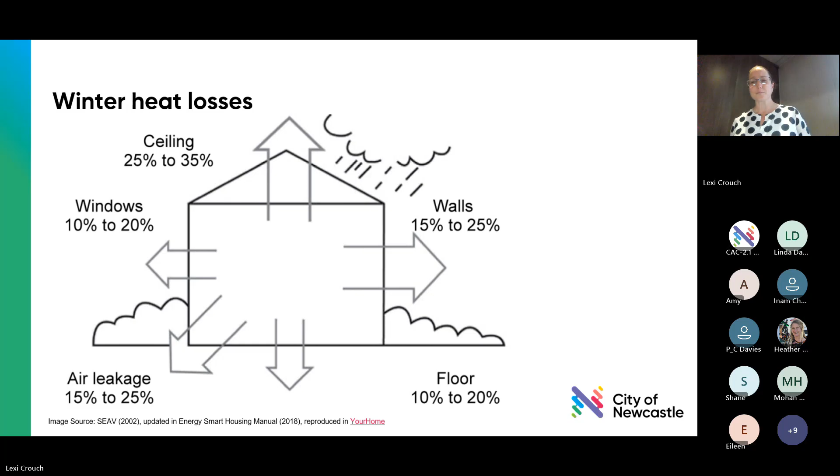We also lose heat through the walls, the floors, there's air leakage and windows. And depending on your home, these factors might differ. So my home being relatively new, air leakage is probably a big thing. If you're pre-1990s, I would imagine that air leakage, but also potentially all of these could be an issue for you. And you will get a copy of the slides later on, so you'll be able to refer to them later on.

So insulation is always what we start with because it is where you can have that greatest return on investment. You can save up to 45% on your heating and cooling costs. So insulation is both good for winter and for summer with a well-insulated ceiling and roof. If you do wall insulation, you can save up to another 20%.

If you're DIY, although with insulation, you definitely do need to read up before you start putting it in, it can cost as little as $10 to $18 a square metre. So for 100 square metres of roof, you're looking at about $1,000 to $2,000. So not big in the big scheme of things. So in terms of priority, every house, the first thing you want to do is address ceiling gaps, and I'll show you some on the next slide.

The second no-brainer for any kind of house is to increase or add ceiling insulation. So when I did my home, R2.5 was considered good. Now you want R5. And the easiest way to do that is I've got 2.5. I can go in, put another layer on top, and 2.5 plus 2.5, you're up to 5. So when I built, 5 wasn't particularly easily available, whereas now you can go to a lot of hardware shops, insulation places, and get R5 ceiling insulation.

If you walk upstairs into the front of your house, chances are you're on piers and joists. So if you walk upstairs and you can get access under your house, you can then look at doing underfloor insulation, and that can be a decent investment. And if you're doing renos, you'd want to do underfloor.

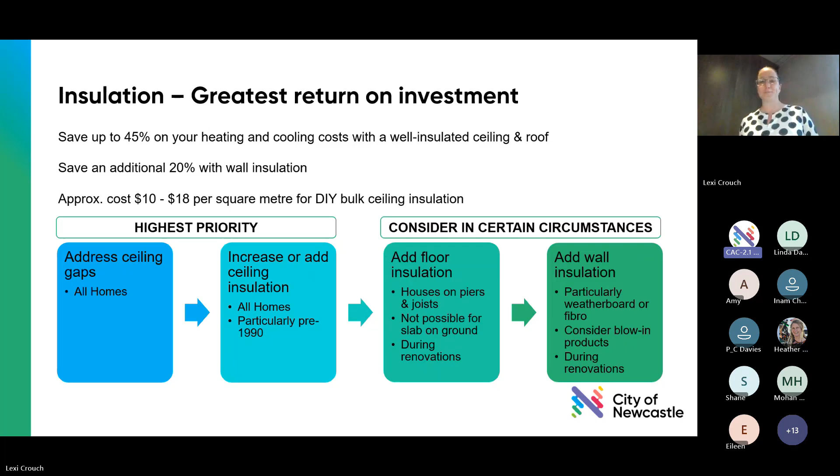So these are a couple of photos that I've accumulated along the years. The first one on the left is my in-laws' house. They had a leaking roof recently, and I went up there and went, oh my God. It seems like every bit of reno that they've done in the last 40, 50 years has meant insulation's been moved. It obviously wasn't put in certain spots. And so just a 5% gap can mean a 50% reduction in performance.

So that image on the left is not what you're after. The image in the middle is from my home.

I thought things were pretty schmick until I took one of our home energy kits, which are available for hire, went round shooting at the roof on a hot day and went, why is there a big gap above my light fitting? It's a dangling light fitting, it doesn't produce heat up in the roof, so there's no reason for it not to have insulation. When I went up there, there was just a gap, and heat is oozing up through that gap.

This is where with insulation, you have to be careful. When I went into my bathroom, there's a gap above my 3-way heat lamp fan combo, but there's a reason for that - that heat lamp is producing heat, and you don't want insulation up against it. Likewise, you don't want insulation up against a halogen light fitting because they produce heat. So there are some spots where you should have a gap, but often the gaps in the left two images, there's no reason for them.

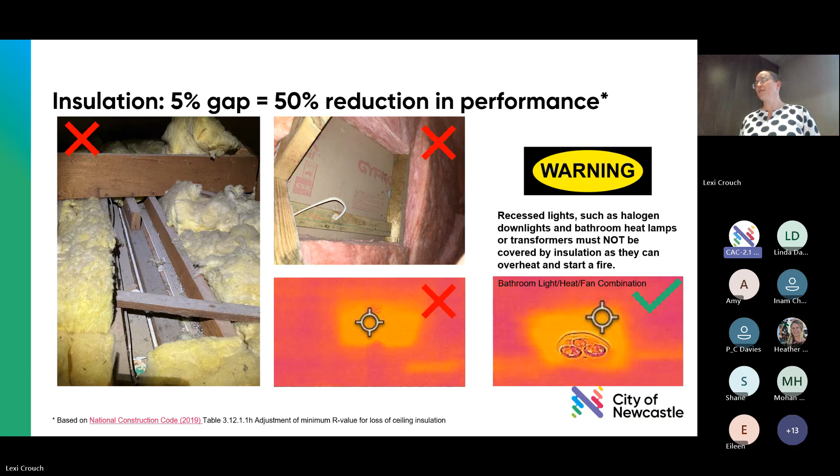If you've got those gaps, plug them up relatively cheaply. Then there's draft proofing, which was my experience as a kid - I swear my entire house leaked from every single spot. Even when I went down there last week, it was still leaking.

This is a photo on the left of one of my colleagues' homes. Not only has she got a gap that lets in the cold air, but it's probably also letting in mice, cockroaches, and dust. So if you're not even going to do it for warmth, do it for all those other reasons. It is relatively easy and cheap, and it is quite addictive.

So once you've got weather stripping, a caulking gun - which is just you press it and the gloop comes out the other end - and expandable foam, those are your typical tools of the trade. You can go around your house wherever you can feel cold, or you can use an incense stick. If you can feel that air moving, chances are you want to block it up.

Slight warning - if you have internal gas appliances without a flue, or a wood fire heater, they will be producing harmful gases that you don't want in your home. So if you plug up all the gaps, you could potentially be poisoning yourself. All the more reason to get off gas and off wood fire heaters. There's probably a reason why I had asthma as a kid, because we had a wood fired heater and a gas stove.

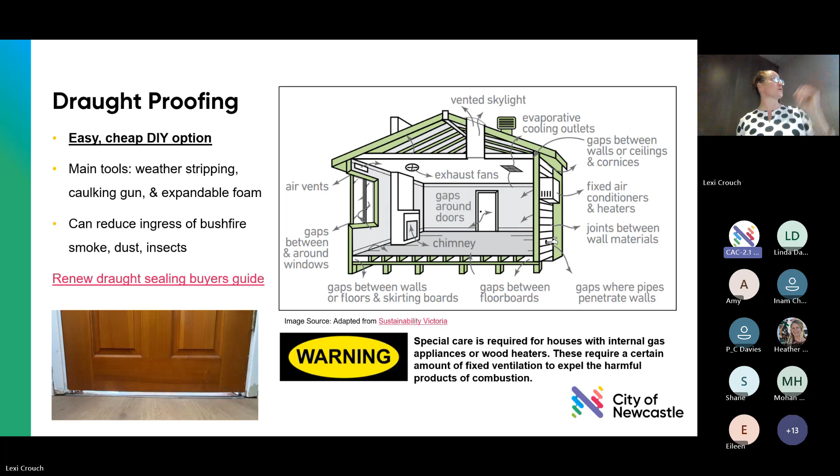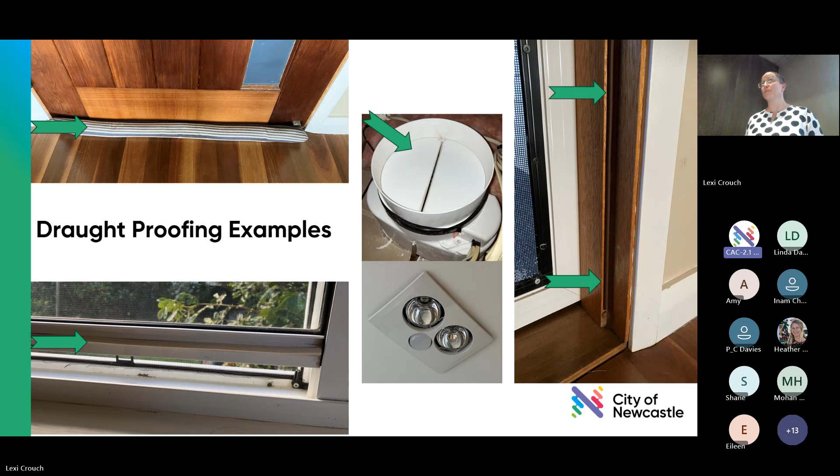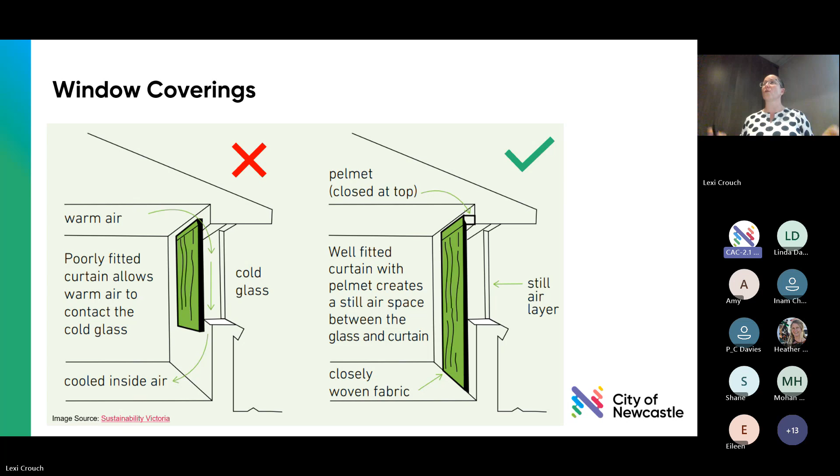So window coverings - on the left is what you don't want. When I built, roller blinds were all the rage, and they are pretty pathetic. Same with vertical blinds, because they let warm air fall down over the cold glass, you lose all your heat, and end up with a cold draft coming out the bottom. What you want is a window covering that doesn't let warm air go down beside the glass and runs all the way to the floor or is fitted neatly around your window.

I couldn't find a good photo of curtains with a pelmet. For people who are renting, a pelmet doesn't have to look ghastly and hideous like they used to when I was a kid - you can do perspex ones.

You can even use cardboard or roll-up towels to block air coming in from the top. You can also do plantation shutters. My mother-in-law decided plantation shutters would uplift her drab 1970s house, but they also work great because when it's cold, she can close the louvers and not have that warm air touching the windows.

Or you can go with honeycomb blinds. The advantage is you can move them up or down, so they're good for privacy too. When you want to be warm or cool in summer, you can have them going all the way to the top and bottom. The main thing is to have something that goes all the way to the edges and all the way to the top, so there's no gaps.

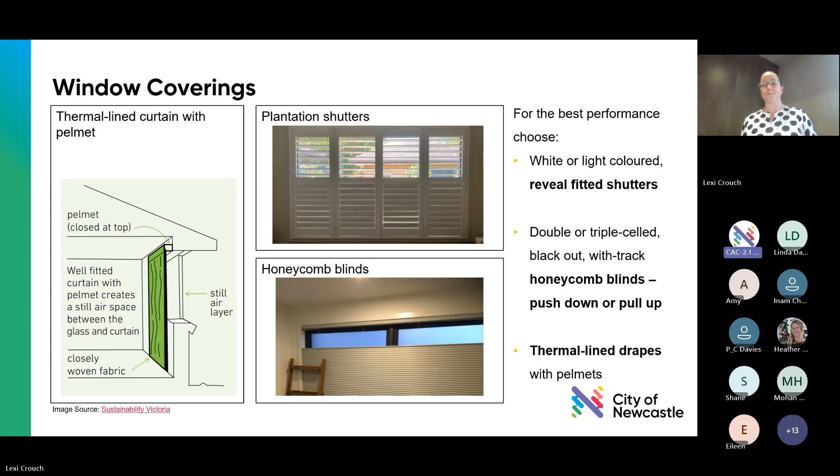Then we move on to floor coverings and room partitioning. I have tiles in one area, which is great in summer because tiles absorb all the heat and never increase in temperature. But in winter, that's not what you're after.

So I went to one of the carpet suppliers and bought an end of roll quite cheaply, which is great for renters. Got it edged and put it on my tiles. What that effectively means is when I've got a heater running, those tiles aren't absorbing the heat, and the carpet is also warm to touch. If you wanted to in summer, I can roll that up and the dog can lie on the tiles and be perfectly happy.

If you live in a really old home with timber flooring, like my parents' place, chances are you've got air coming up through the gaps in your floorboards. My mum put a rug down and worked out why her room was suddenly warm - it was because there was no more air coming up underneath the bed and everywhere else. So carpets provide a bit of insulation, even though they're quite thin, and a little bit of draft protection.

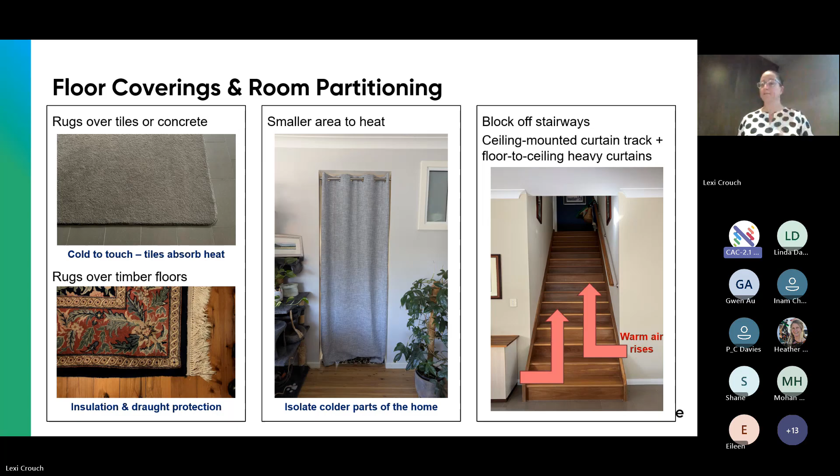I couldn't find a photo, but if you Google, there are plenty of decent looking ceiling-mounted curtain rails, both straight and curved. It's possible to put a curtain at the bottom of your stairs, going from floor to ceiling, and that will stop the heat going upstairs. In summer, you could do the reverse - have it up the top so the cold air doesn't all pull to one end of the house.

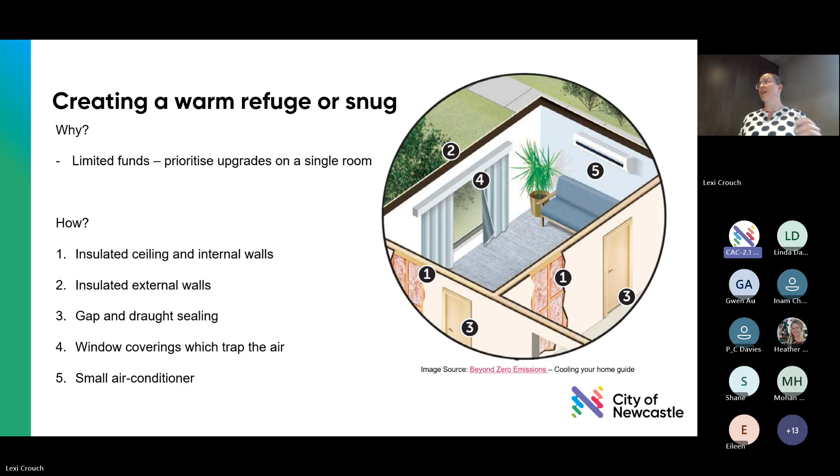And finally, if money's short and you don't know where to start, consider just creating a warm refuge or snug - look at one room. Maybe it's your home office, maybe it's the nursery. It might be one area where you want to spend your money - just one room. So you do the things we've mentioned: the ceiling insulation, potentially only insulating those few external and internal walls, gap and draught sealing, and the window coverings. Then the beauty is you only need a very small appliance like an air conditioner to keep that small room warm.

One of the banes of living in a house is managing condensation. If you have people and pets, dry clothes indoors, have showers, cook, or have indoor plants, all of that releases moisture into the air. When the air is warm, that moisture stays in the air, and at night, when it cools down, particularly hitting a glass window, it releases that moisture. You wake up in the morning with moisture on your windows, but it can also condense on walls and the back of furnishings. So if you want a warm and comfortable home, you have to look at managing your condensation.

Exhaust fans are a must. With my bathrooms, in the daytime I close the door and open the window to really let that air out. Once I've had my shower, I put the exhaust fan on for a significant period of time to get that air out. Wiping down windows might sound tedious, but once you wipe the window down and put that cloth outside, you've effectively taken all that moisture and put it outside your house. If you just let it sit there, when you put your air con on to warm up your house in the daytime, that moisture will go back into the air.

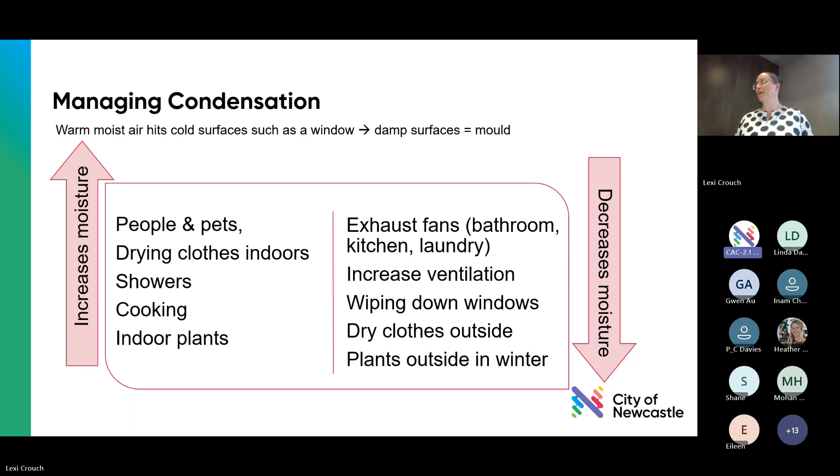Then it will be back on your windows that night, and potentially can grow mold. Dry clothes outside, and what I've started doing is giving my indoor plants an outdoor winter, because otherwise they're releasing more moisture into the air.

So that is it from me for retrofits. There'll be opportunity for questions from me afterwards, but I'll hand over to Lexi, who is our energy efficiency and appliance guru.

Thank you, Sally, for a very informative presentation. So I'm going to talk a little bit about appliances, and a lot of this I learned the hard way. When I first moved in with my wife, we played this lovely game of tug of war. She would walk around the house in a t-shirt in winter, have the aircon turned up to 26 and cranking all day long. I would come in and turn it off, put a hoodie on and some Ugg boots, and just sit in the cold. So guess who finally won that one when the $700 electricity bill rolled around?

With electricity prices going up and up and up, it's no longer an affordable exercise or a luxury to do those things. So we need to look at things that are going to keep us warm, but in a cost-effective way. I thought I'd start by sharing the first thing that comes to mind when I think warm and efficient, and that's heating your body and not the room.

Very obvious, but are we actually all doing it? I think back to when I was a young kid and I had one of these fuddy-duddy electric blankets on my bed, but gosh darn did it work. Now the heated throw has come along, this new piece of luxury, the younger, hipper sibling of the electric blanket, where you can take it on adventures around the house.

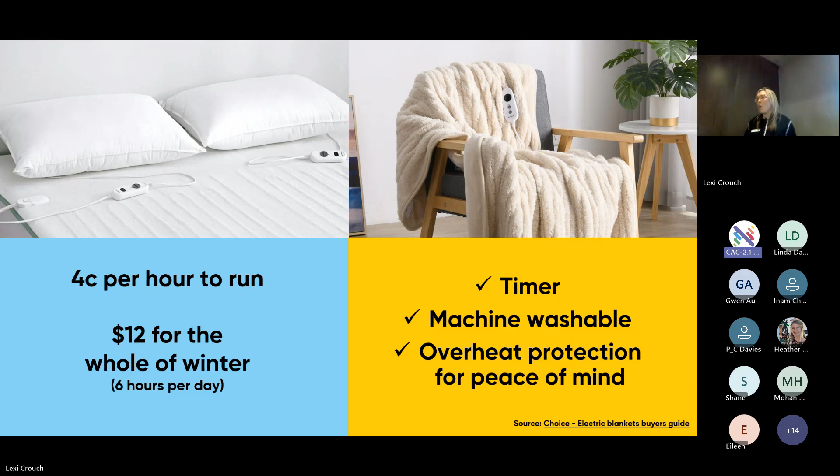But there are some times when we're entertaining, or we don't want to wear our hoodie around, that we need to heat the room and not our body. So have a think about what you think is the most efficient way to heat the room, and we'll go through it now. The way that we measure efficiency of heating, and this is hopefully the only time I'll get technical, is called a coefficient of performance.

So basically, if you're putting 1 kilowatt of energy in, how much are you getting out in terms of heat? That's what it's called, it's a measure of efficiency. A portable gas heater, for example, is one of the least efficient ways to heat your home. It's 0.7, so 70% efficient. You're putting 1 kilowatt of electricity in and it's giving you 70% heat out. So it's losing energy along the way, not very efficient.

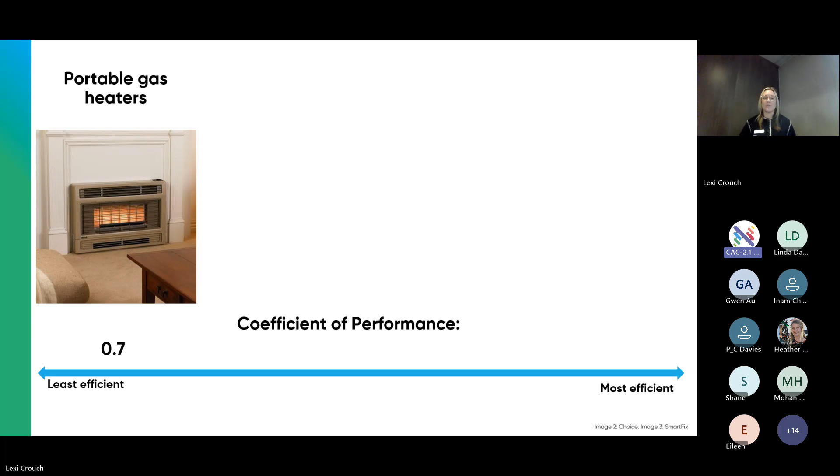Your portable electric heater, for example, is 100% efficient. You put 1 kilowatt in, you get 1 kilowatt out. Contrast that with a ducted reverse cycle air conditioner, 300 to 500% efficiency. And then even better, a wall-mounted split system reverse cycle air conditioner.

I'm not going to say that again, that's a mouthful, we'll call it wall splits. They are the most efficient appliance you can get to both heat and cool your home. So why have something that just heats when with climate change we need something that will do a really good job at cooling too? That's going to be our number one priority moving forward. So that's 400 to 600% efficiency.

The reason these appliances are so efficient is because they're not actually generating heat like the others, they're moving it. They're finding it outside and moving that heat from the outside air into your home. That's all it's doing, and that's why it's so efficient. The other appliance that does that in your home is your refrigerator. It's called heat pump technology.

So if you're looking to upgrade, this is the most efficient appliance you can get. It is more efficient than ducted, because ducted has losses along the way as it travels from other rooms, and you're also heating a lot larger portions of the home. In my mum's house, upstairs or downstairs, and that house is huge, she might be in one room upstairs and it's heating the whole thing. You can imagine the cost behind that.

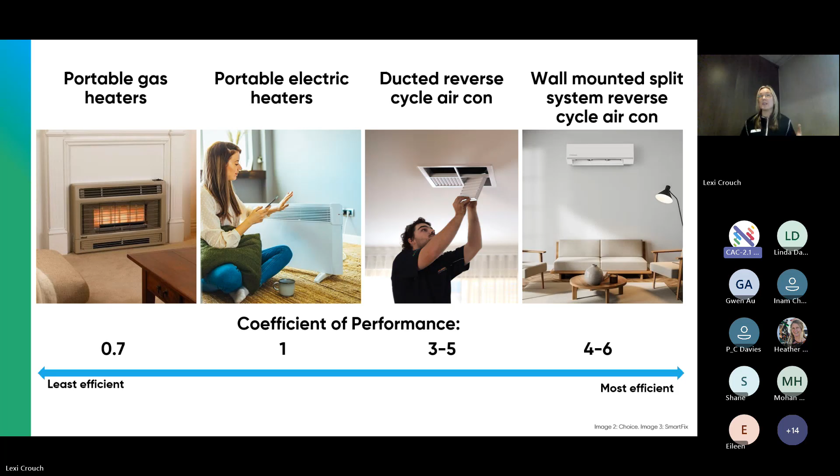Wall splits are a lot cheaper, you whack 4 or 5 of them across your house and it just heats the room that you or the people are in. So a lot more efficient. That's why I've seen a lot of people that when their ducted reverse cycle air conditioner comes to end of life, they last about 15 years tops, switching over to lots of wall-mounted split systems.

So what about gas and wood heating? Sally touched on this a little earlier, but essentially gas heating, we're burning gas in our home, same as gas cooking. And when we do that, it's releasing poisonous gases. That's why we've got to have them flued, or if it's unflued, like this one pictured here, we've got to have a window open, which kind of defeats the purpose of our draft proofing activities, if we're letting all that cold air in. But we have to, because of how toxic those gases are.

It's so bad that it's been linked to asthma, it's carcinogenic, strokes and heart disease, and cooking with gas in the home is responsible for 12% of childhood asthma.

I had this conversation with my mum, who I went to Bali with, and she said, wow, my asthma disappears every time I go on holiday. I wonder if it's because I'm not drinking so much coffee or something ridiculous, whatever she said. And I said, Mum, it's because you're not cooking with gas in the home. That's the number one reason you've got this asthma. So she's since gone and replaced that with an induction stove, which we've got a little sampler of over there that you can borrow from the library for free if you want to try out that technology.

Gas heating is the same. Wood heating, medical studies show there's actually no safe level at which to breathe wood smoke. I'm going camping this weekend, and unfortunately no campfires for us.

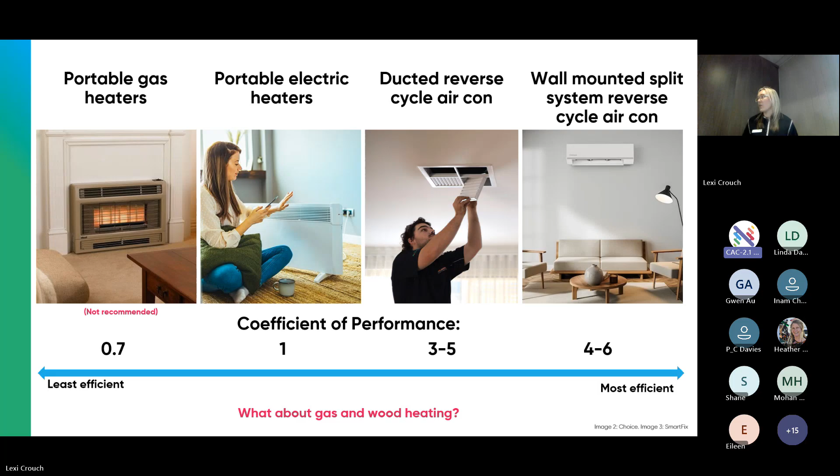So that's why we're seeing a movement called electrification. This has really taken off in Australia, but also overseas, as people's gas appliances reach end of life, they're switching to electric appliances. This is also so they can take advantage of the power of the sun, running these appliances for free from their solar and battery systems. There's a massive electrification movement going on, and we've got some action plans if you're interested in learning about that, whether you're a homeowner, a renter, or live in strata, with information about how you can plan for that longer term transition.

Some little hacks on how to get the most out of your wall splits.

A few years ago, I thought my reverse cycle air conditioner just stopped working. There was nothing coming out of it, it wasn't heating. Turns out I hadn't cleaned the filters before. So I did that, and it was like a brand new machine. I cannot emphasize enough what a difference this will make to your air conditioner. So all I did was YouTube my brand of wall splits and just followed the instructions there.

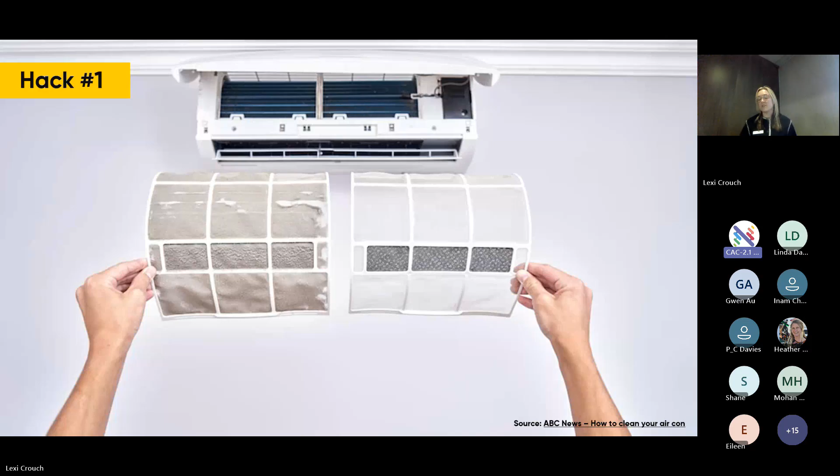Hack number 2: the World Health Organization recommends setting your air conditioner to 18 to 20 degrees Celsius. That's the best happy medium for health, comfort, and your hip pocket as well. So that's what they recommend, not 26, like my wife.

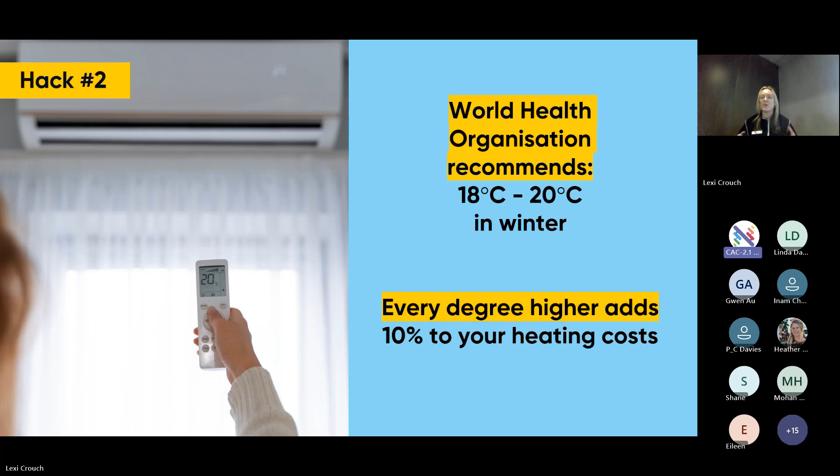Don't do that. And if you do need to heat it higher, that's fine, just know that every extra degree above 20 degrees adds 10% to your costs. So 25 degrees, that's an extra 50% of how much it's going to cost you. So just keep that in mind, and then maybe you won't have it on for as long, or maybe you'll reach for that wonderful throw rug.

Another hack is actually using our ceiling fans in winter. Does anyone do this? Ceiling fans are so efficient, 1 cent per hour to run, so they're so cost effective they're basically not even noticeable on your bill. So when I moved into my new home, a 1960s, very inefficient home, one of the first things I did was install ceiling fans, and they were on every day, all day through summer.

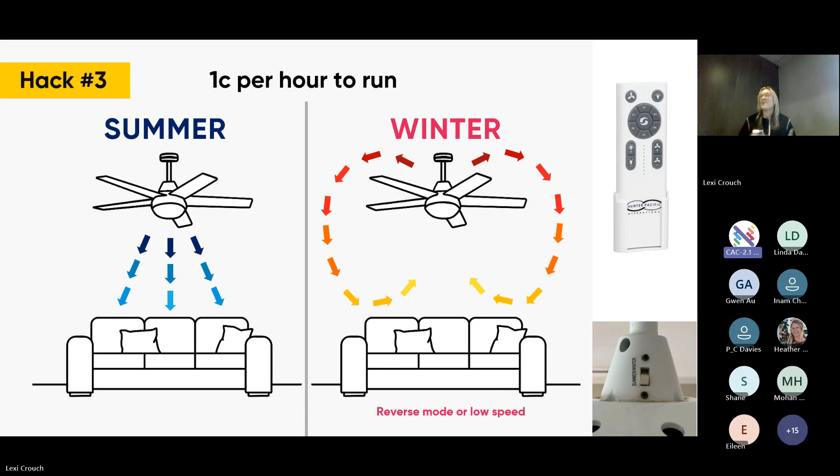They're incredible. There's a little reverse mode on the remote, or on a switch for some older fans. Basically what it does is hot air rises, we all know that, and the reverse mode brings that hot air down as well. So that's a really simple way to get the most out of your air conditioner.

I know that there are some renters online and in the room as well, and portable electric appliances may be your only option. But as I mentioned before, they're going to cost 5 times as much as a reverse cycle air conditioner, so they're hugely expensive. But in some cases we have no choice, we need to turn to these devices because we're freezing cold. So I would say choose electric, choose one of these options.

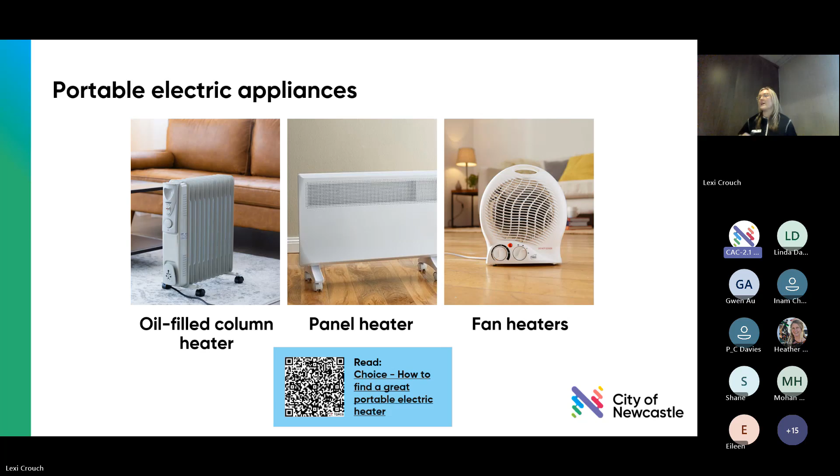I won't go through the pros and cons tonight because there's so much to go through, but I put a QR code and a link there to Choice, who does a great explainer, and you can read that to find out which is best for you, depending on whether you have little kids in the house that might be touching it, what space you're heating, and whether you plan to have it on all night or just under your desk. So just have a read of that, and it can help you find the best option.

I'll talk about a few ways that we can reduce our energy costs, because that's the other thing, our bills are going up and up and up. But most Australians actually aren't shopping around to get a better deal, and it's super easy to do. So you're probably overpaying if you're not doing this every single year.

Shop around every tax time, shop around for a new energy plan as well, because all the retailers put their rates up in July, and they certainly did on the 1st of July this year. So after tax, make this the next way that you make a few hundred dollars. Why not? It's the easiest money you'll ever make in about 30 minutes.

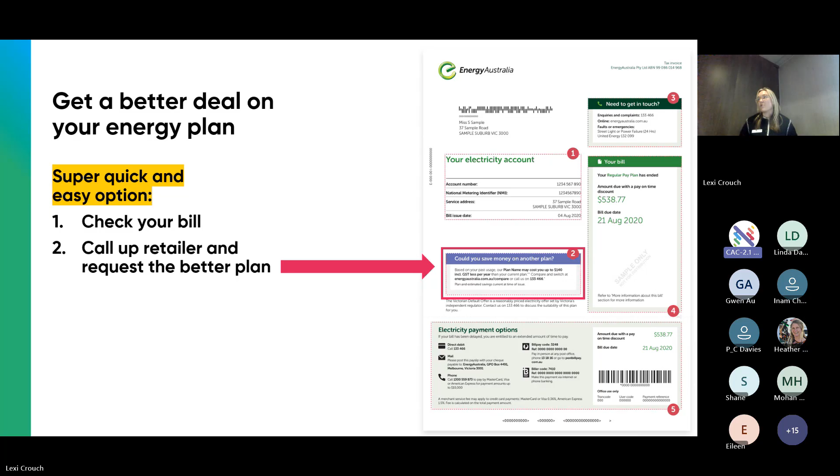If you're super duper lazy and want a solution you can do in about 5-10 minutes, get out your latest electricity bill. Energy retailers are now forced, or mandated, to tell you if they have a better plan and you're not on it. So all you need to do is navigate to that pink box there and it'll tell you whether you're on their best plan. And if you're not, call them up, 5 minutes, say put me on that better plan please. That could save you about $100 or $200. I did it for my grandparents a few weeks ago.

If you've got a little more time up your sleeve, this is what I do: go to Energy Made Easy, it's an Australian government comparison website. You basically just fill out the form, follow the prompts, and it will spit out the cheapest energy plan for your household.

And it will show you how much you will save compared to what you're on now. So I did this for one of my colleagues, Josh, a few weeks ago: $829 per year. Because he's just a busy dad, couple of kids, using a lot of energy, hasn't got time to shop around. $829 a year. Like, in half an hour, show me how you can make more money than that in half an hour. That's pretty good.

So when you're doing this, my advice is to look for 3 things, in this order. The best thing you want to look for is low kilowatt hour rates. What are you paying per kilowatt hour? Then look at the daily supply charge and make sure that's low as well. And then you can look at any sweeteners that they might give you. But know that if you're looking at the carrots and the incentives and the vouchers first, those disappear and then they jack up their prices. So we're always looking at those low rates and the low daily supply charge. If it says demand charge, run. Just don't do it.

And green power, if you want to earn brownie points with me, whack on some green power on there. That's Australian government accredited renewable energy. So you're actually supporting the development of new wind and solar farms in our country and getting 100% renewable energy. So that's a good thing that people living in rental homes can do to support and be part of the energy transition.

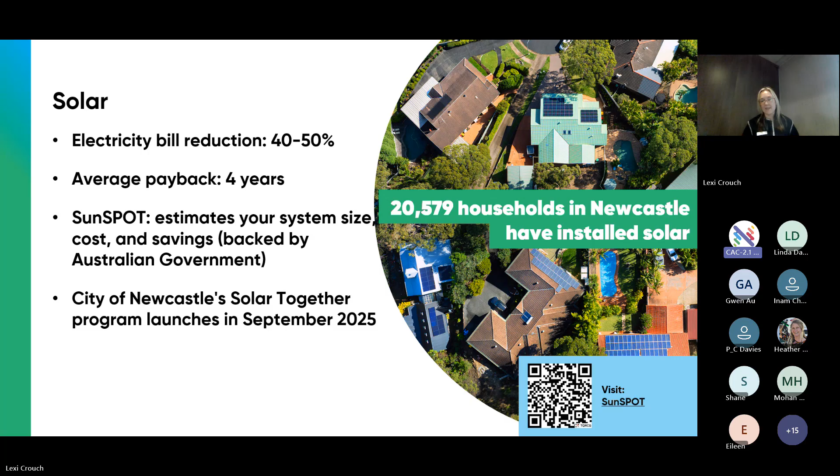So City of Newcastle is developing a solar and battery program for the community to help make it more affordable. We'll do all the hard work for you in selecting those products, selecting the hardware, making sure it's a fair price, really good quality hardware for your home and market leading warranties as well. And then backed by council, so there's that trust element, that we've done all the vetting on your behalf. So we're hoping to have that launched in September this year, and it'll be called Solar Together. That'll be solar, batteries and EV chargers if you're interested in that as well.

And then the new hot appliance is batteries. So if solar can get your bill about 45% cheaper, a battery can take it all the way up to 80% and beyond if you want to do some fandangle stuff like join a virtual power plant.

So on the 1st of July this year, the Australian government launched its Cheaper Home Batteries program, which is essentially a 30% discount of the upfront cost of your battery. So it's taken the payback period for a battery from not great to really good. So good, in fact, that this is the stat that I read the other day: 1,000 batteries are being installed every single day here in Australia since the 1st of July. So the numbers are unprecedented and totally unexpected that the government is having to look at whether they can put more money into this because the batteries are just so popular.

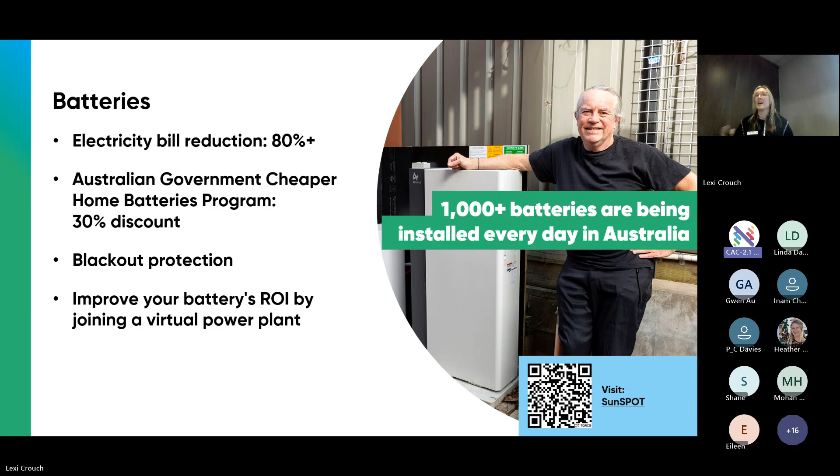The other great thing about batteries as well is the blackout protection element. So that's really important. Heat waves can lead to more blackouts as well, so it's always good to have that blackout protection. And then there are other options, like joining a virtual power plant or playing in the wholesale market, which is a bit advanced for tonight, but it's something to talk about after if anyone's interested. You can actually earn additional income, and your bills will be in credit if you start playing in some of these new things.

So you've learned a lot tonight. Hopefully you've learned something new. There's a lot of different tips there. And one of the questions we get is, where do we start for our home? So one of the things that you can do is get a home energy assessment. This is basically where an accredited assessor, an energy efficiency expert, a thermal envelope expert, will come to your home. They'll do an audit and then they'll give you an action plan tailored to your home. They'll tell you exactly what you need to do, the low-hanging fruit and the longer-term actions, like when your gas heater reaches its end of life, they last about 10 years, then switch to electric, and they'll tell you what type to get, heat pump or electric, for example.

So they cost about $350 to $600. As always with quotes, get 3 quotes from local providers, and this is a great way to help you get a tailored plan for your home. So you can find local assessors through the QR code just there.

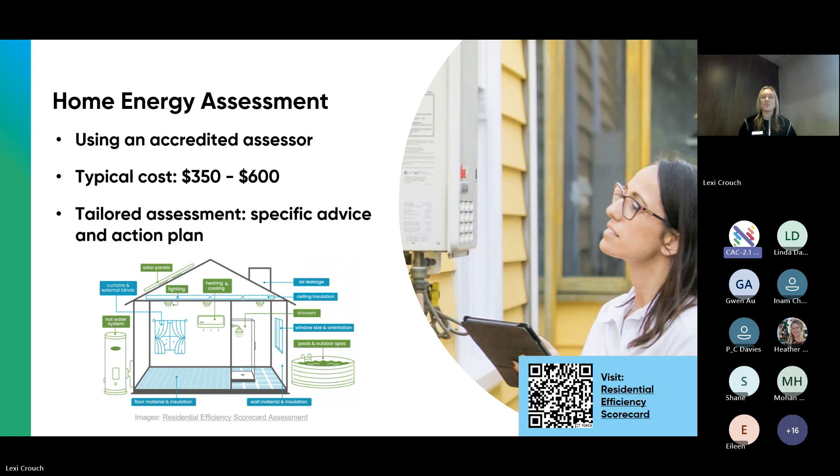And we actually have a program that we've joined at Newcastle for the renters and the landlords that are online or here in the room. We've partnered with Race for 2030, RMIT University and the University of Technology Sydney on a research program to drive energy upgrades in rental properties, some work that is desperately needed for rental properties here in Australia. So what we're doing here in Newcastle is, if you participate in a couple of research interviews, you'll get a free home energy assessment for the house that you are renting, or if you're a landlord, for that house that you're renting out. So valued about $500, and a $50 voucher as well for an additional sweetener. So then you'll get that tailored action plan.

So if you are a renter or a landlord interested in this, I think we were doing about 24 in Newcastle, and there's a bunch happening in Melbourne as well. You can be the first to register your interest in that program. And we will share the slides as well, so you can get access to all these links.

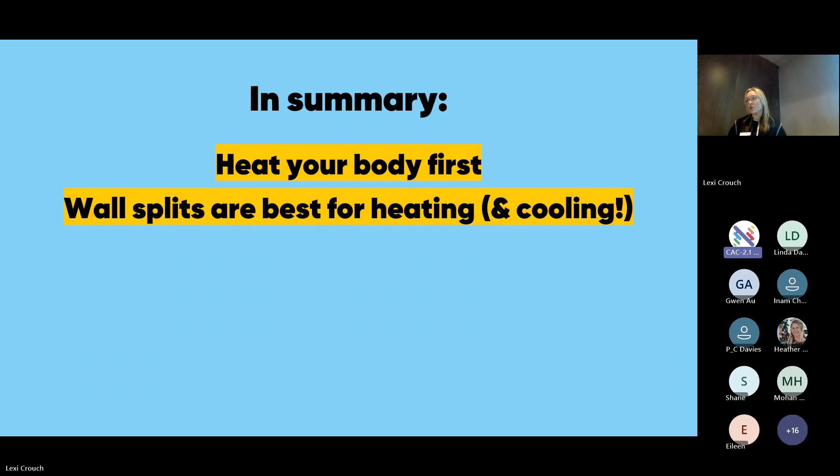So in summary, heat your body. Splits are the best for heating and cooling, and they have a dehumidifier function as well. Dry mode, excellent in summer. Get a better energy deal. It's the easiest money you will ever make. Half an hour, do it. Power your home with the sun, and consider a home energy efficiency assessment if you're not sure where to start or what to do next to get that tailored plan.

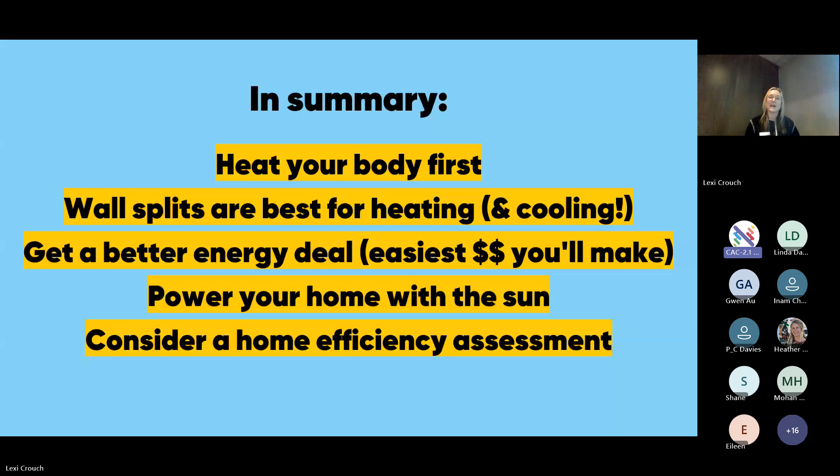If you want to learn more about anything that we've spoken about tonight, we've got some great resources that are available in our Newcastle libraries for you to borrow. Your Home, we've got the hard copy book in our libraries, but it's also available freely online. That's an Australian government resource, and it's full of information, and a lot of the presentation tonight was drawn from that document. There's also some great books about electrification and electric appliances as well.

So they're available from the library, and the Facebook group, My Efficient Electric Home, is a wealth of knowledge. These are people that are electrifying their homes, sharing their journey. Any question that you have, it's been asked in there and experts have responded. So definitely go there and search for information. And of course, please help yourselves to our action plans as well.

So again, what Sally and I have spoken about tonight is all on the Your Warm Home action plan over there. And for those online, we'll drop it into the chat later and send it through tomorrow. But it's the pink action plan. Everything we've spoken about tonight is on there. So you can actually go through and tick, okay, I want to look more into that. I want to put that on my list.

Over there, we've got our home energy kits as well. So this is a new addition to Newcastle libraries, and they are so popular. We have a wait list that is over 40 weeks long. So we are going to get more of these into the libraries for you. We're going to shorten the period as well. So if you're interested in these, you can jump onto Newcastle Libraries catalogue, put your name down on the list in time for summer. But we'll get some more out as well. So the wait time will shorten, because they're very useful. And Sally gave a bunch of examples for how you can use them.